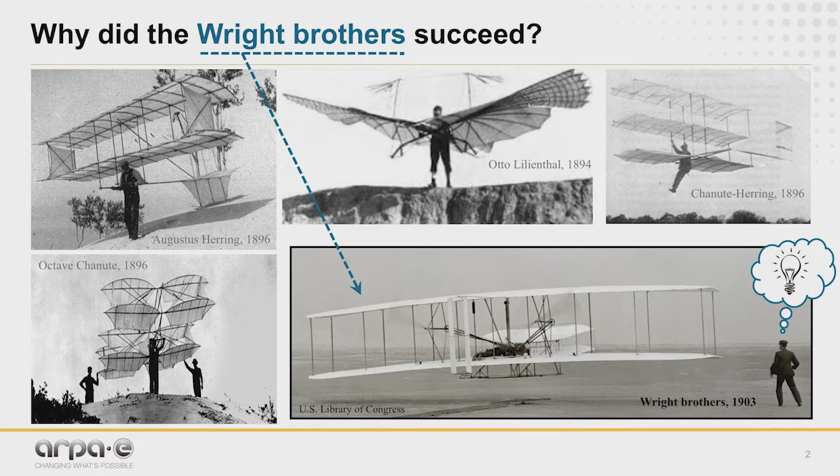You can be thinking that maybe it's because of the very interesting and advanced airfoils that they put together, or maybe because of the experiments in the wind tunnels. I would like you to see an answer in the area of control. In my opinion, it's because they used control concepts in the design of the system.

The plane of the Wright brothers had very small wings at the front. Because of this, we actually change the relative position of the lift and the weight, and the plane itself tends to overturn and quickly go upside down. They did this because they realized they needed a plane that was very fast, reacting to wind disturbances in order to be able to fly.

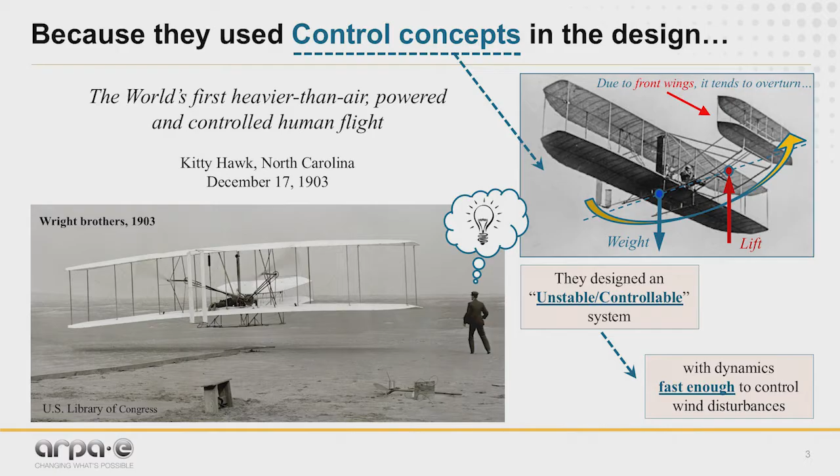This is actually a control concept that they found, and the plane is actually unstable. So they also put a control system to stabilize the plane. Control was in the very beginning of the thinking of the system, and by putting these small wings they were able to be fast enough to reject the disturbances.

Another very interesting example, now in energy, is the very first wind turbine for electrical generation. That was actually in Cleveland, Ohio, in 1887. The engineer who put this together was Charles Brush, one of the pioneers of the electrical field. One of the things he did was also to incorporate these control ideas.

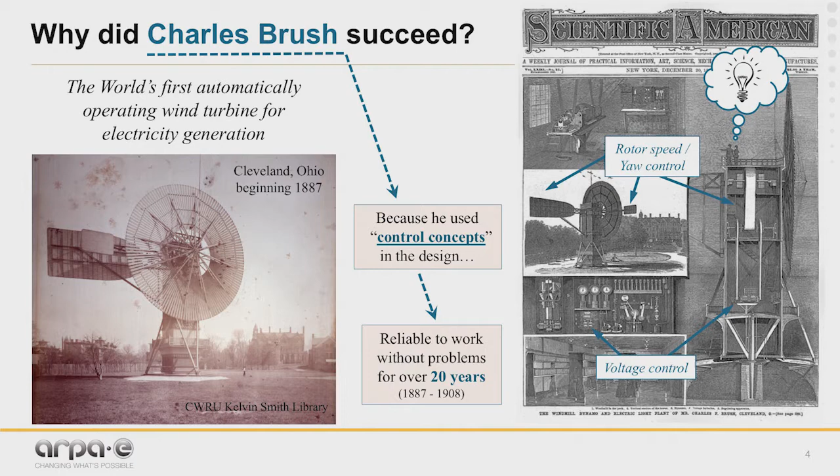It was actually a huge system, more than 17 meters diameter, 144 blades, but one of the keys was the incorporation of a rotor control with a yaw control system, and that allowed the system to work without any problem for over 20 years. So again, control at the very beginning of the design of the process.

However, we are not in the same situation today. Many of our universities, and the way we study engineering today, is very specialized, because technical systems are more and more difficult, so we have to specialize, but now we have a narrower picture.

So it's more difficult to work as these pioneers, like the Wright brothers or Charles Brush, did in the past. As a consequence, we have a sequential way of working generally in companies: when we have a problem, first of all we design—let's say if it's a wind turbine—the aerodynamics, the mechanical structure.

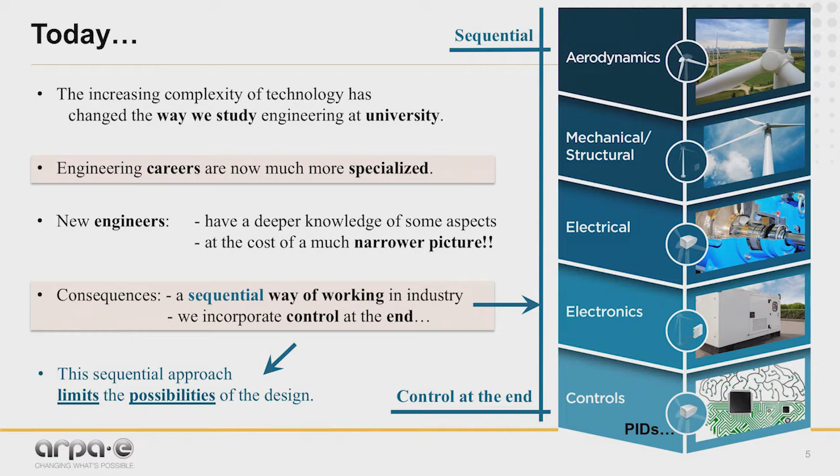Then the electrical problem, the electronics. And at the very end of the picture, we ask the control engineers to develop the control solution, the control algorithms to control the system automatically, maybe with PIDs or things like that. This way of thinking, this way of working, is actually limiting the possibilities to have an optimal design at the end.

So my idea for this fast pitch today is just one thing: to go back to this multidisciplinary, concurrent engineering way of thinking, putting control concepts from the very beginning of the design of the system.

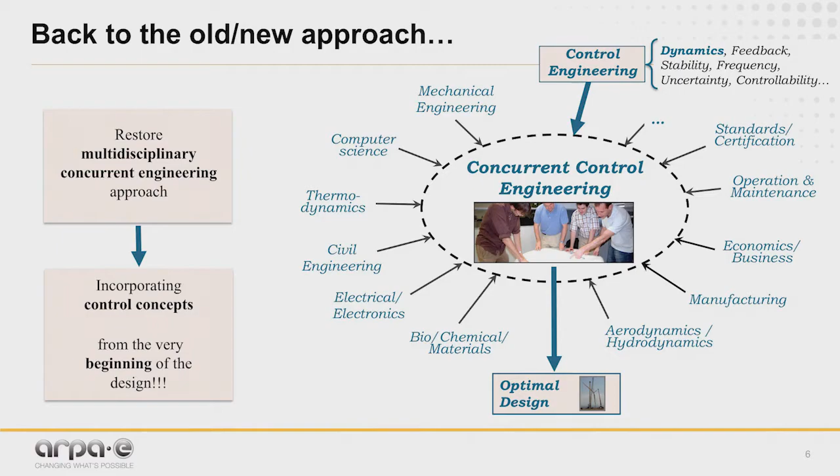So we have to have all the engineering departments working together: the mechanical engineers, the electrical engineers, the aerodynamics engineers, thermodynamics, whatever we have, with the control engineers as well, with the economics, with the operation and maintenance, with the regulations, with the standards, with the certification, everything in the same table, working together, and actually incorporating control engineering concepts—things like dynamics, feedback, stability—the things that the Wright brothers put into the picture to be successful. In this way, we will be able to reach optimal designs in many areas.

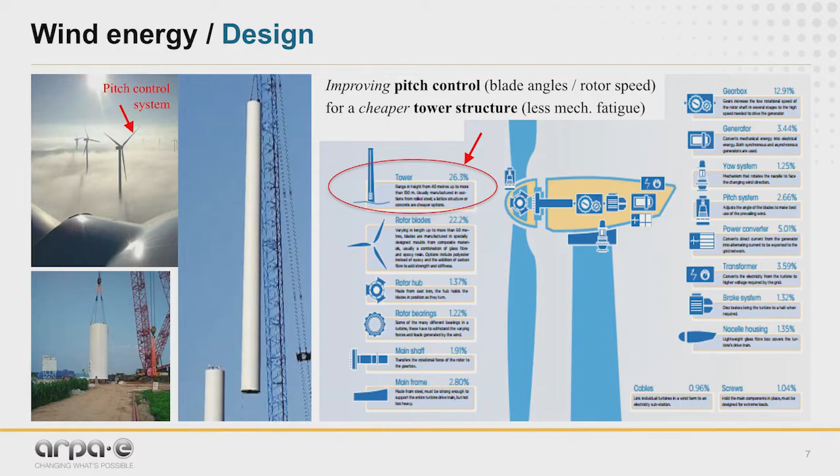A couple of examples, actually personal ones I was involved in the past, quickly. One is about wind energy. I remember a project at the end of the 90s where I was involved in a multi-megawatt wind turbine design. By designing a better pitch control system that moves the blades to control the rotor speed, we actually reduced a lot of the mechanical fatigue of the tower, and we were able to have a much cheaper tower—about 30% cheaper than the competitor building a machine of the same size at the same time. So this is control at the very beginning, helping us have a much better design at the end.

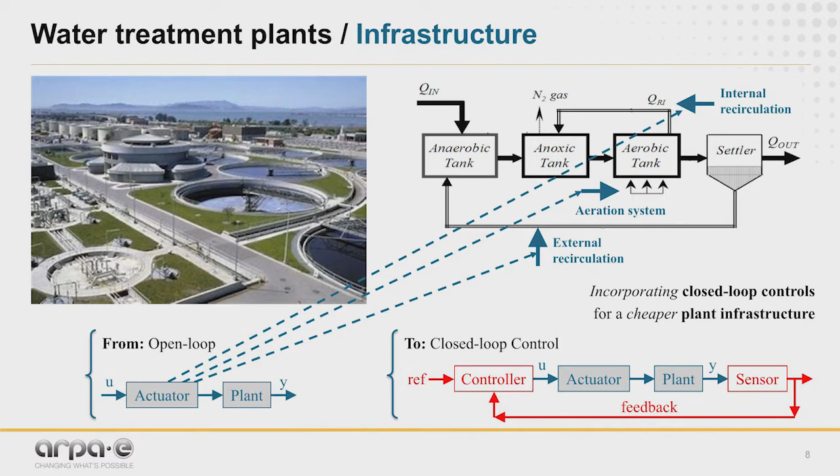Another project I was involved in, same period, was about a water treatment plant for a big city. Usually water treatment plants have actuators—like this one you see in the picture, for nitrates and ammonia removal. So you have about 3 actuators working continuously with the same set point, typically depending on the temperature—3 or 4 different set points over the year. You also have internal recirculation, external recirculation, and other things like that. If we incorporate sensors, feedback, and control, we will be able not only to improve the performance but also to reduce the cost of the installation and infrastructure, and this is a very big thing.

With all these ideas, I would like to propose a potential new ARPA-E program around these fundamental concepts of concurrent control engineering. This program—and I'd really like your feedback on this—would bring together many different communities: mechanical engineers, electrical engineers, bioengineers, chemical engineers, all kinds of engineers, control engineers, economics, etc. We need this new philosophy to design systems. We probably need some mathematical formulation of how to incorporate dynamics, feedback, and control into the picture. We need special sensors or new actuators, distributed sensors, optimization algorithms, taking into account things like artificial intelligence or machine learning, all ending up in a computer program to do the optimization.

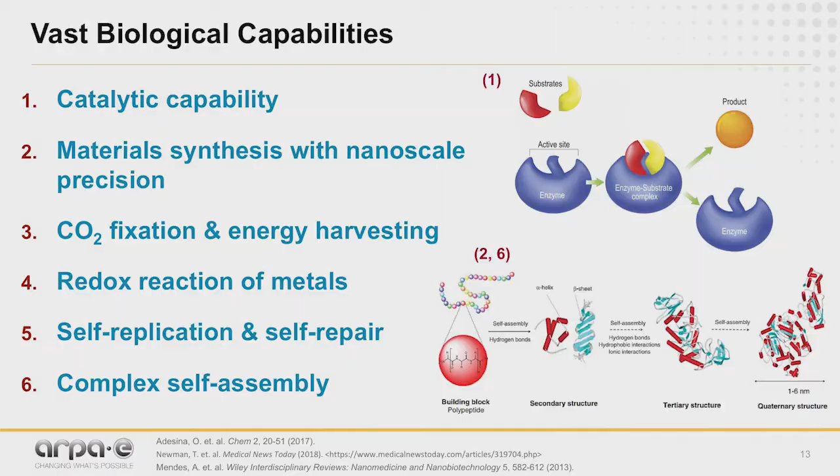So we can imagine that if we can harness all these vast biological capabilities of microbes, we can start developing technologies that could be potentially unparalleled, not only in their low cost, but also their deployability. We're also luckily living in an era where researchers have figured out ways to engineer microbes specifically to produce unique types of products and materials.

One way we can envision doing this is by very precisely designing what genes we want our microbes to express. We can then synthetically build this DNA, insert it into a host cell, allow the cell to replicate, and in the process produce the various materials and products that we desire.

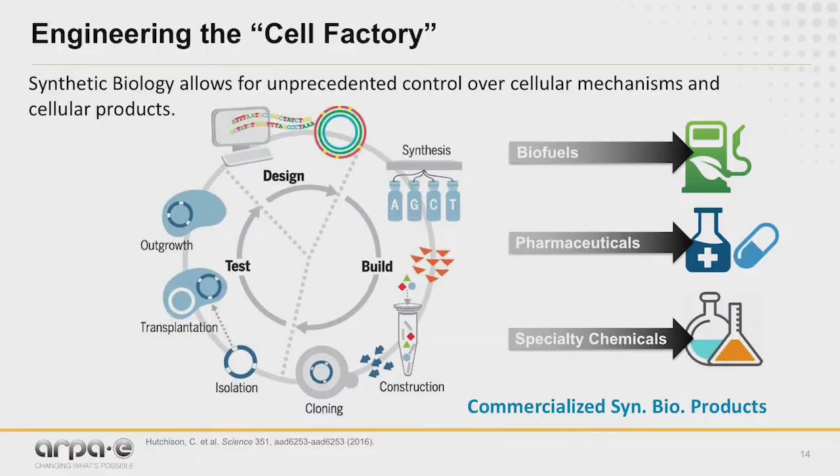In fact, synthetic biology has matured to such a point that we're already seeing commercial efforts in areas like algae-based biofuels, pharmaceuticals, and even specialty chemicals. But with such a rich technology to work with, I want to ask: what more can we do with synthetic biology? Specifically, can it help us generate materials, structures, and processes that were previously thought to be impractical or maybe even impossible using biology?

One area I want to think about is electronic waste. In 2016, the US alone produced about 6.3 million metric tons of electronic waste. And globally, about 80% of this electronic waste gets either landfilled or incinerated.

Without even considering the energy input necessary to build these electronics, just purely focusing on the material side of things, recovering the metal from 100,000 phones, which is really not that much, will yield about 5 pounds of gold, 2,000 pounds of copper, and 55 pounds of silver. Right now, all of these useful materials are simply either sitting in a landfill or being systematically destroyed.

Knowing that certain microbes can actually participate in the redox reaction of metals, I want to pose the question: can synthetic biology make recycling of electronic waste practical?

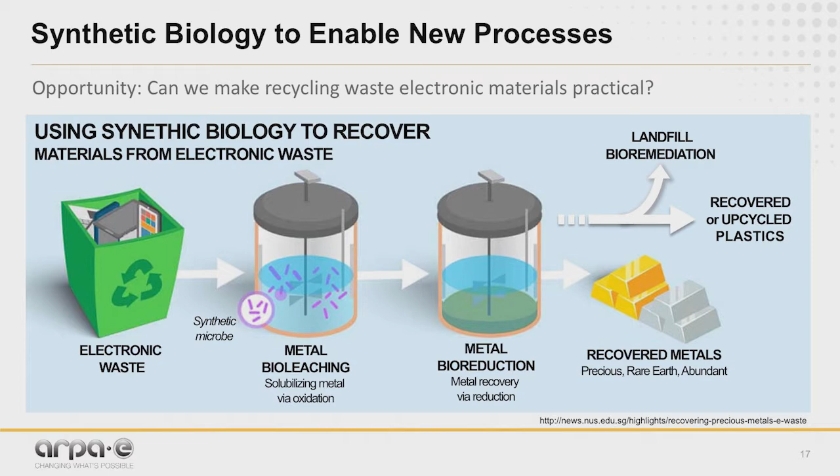Instead of incinerating or landfilling these electronic materials, what about designing or synthesizing microbes that can act in a bio-leaching capacity, and can bio-reduce metals across the entire spectrum, from precious and rare earth to even abundant metals? What about also engineering microbes to potentially recover plastics or aid in landfill remediation?

So in some sense, this scheme gives us an idea of how we can use synthetic biology to tear electronics down. But what about also using synthetic biology to build electronics back up? Can we exploit additional biological facets like nanoscale manufacturing precision and self-assembly to create complex molecules and nanostructures that might otherwise be too cost prohibitive to make synthetically, and that could be made outside the confines of an energy-intensive clean room facility?

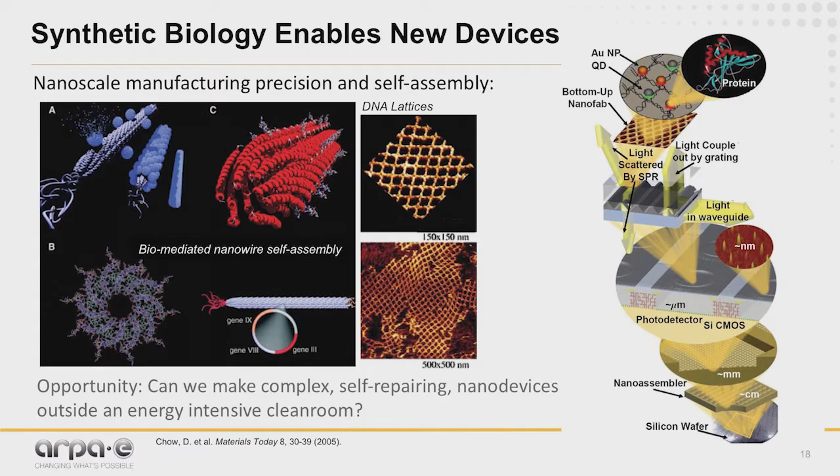But what about also using synthetic biology to make more macro-scale materials? Recently, synthetic biology has allowed us to engineer microbes that can secrete very specialized extracellular materials, essentially creating highly functionalized biofilms. Can we very specifically tailor the type of biofilms we create to generate membranes and films that possess a gamut of properties, including programmable adhesion, maybe even electronic and optical properties?

And what about programmable material properties? If we're able to do this, is this perhaps a pathway that can allow us to make ultra-cheap, high-performance, tailored membranes?

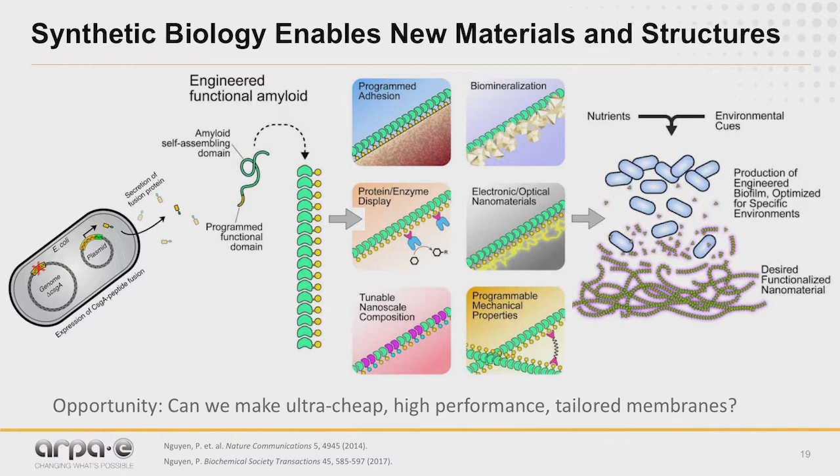If this is perhaps a pathway to do that, that could have huge implications in the area of industrial separations. So currently, separation processes account for about 16% of the total US energy consumption, and about half of separation processes currently rely on distillation.

If we were able to replace about 90% of distillation with membrane-based separation, this would allow for about 7 quads of energy to be saved annually. This is a huge amount of energy.

But currently, there are several barriers to the adoption of membrane-based technologies. Namely, many current state-of-the-art membranes are incredibly expensive. A lot of them can't tolerate harsh conditions like high temperatures, pressures, and extreme pH. Furthermore, most of them are susceptible to fouling.

But interestingly, microbes have been generating biofilms for generations that can survive in the harshest of terrestrial environments. They can survive high temperatures, high pressures, high salinity, even extremely acidic and basic conditions. So I want to posit the question, is maybe one future direction for industrial separations going to be due to synthetic biology? Can we possibly use biofilms for these purposes?

So ultimately, I want to ask, what breakthroughs need to happen in order for synthetic biology to really revolutionize our energy landscape? And I want to pose this question to you. What innovations are necessary for synthetic biology to produce materials, structures, and processes that, first off, can behave with superior performance relative to their non-biological counterparts?

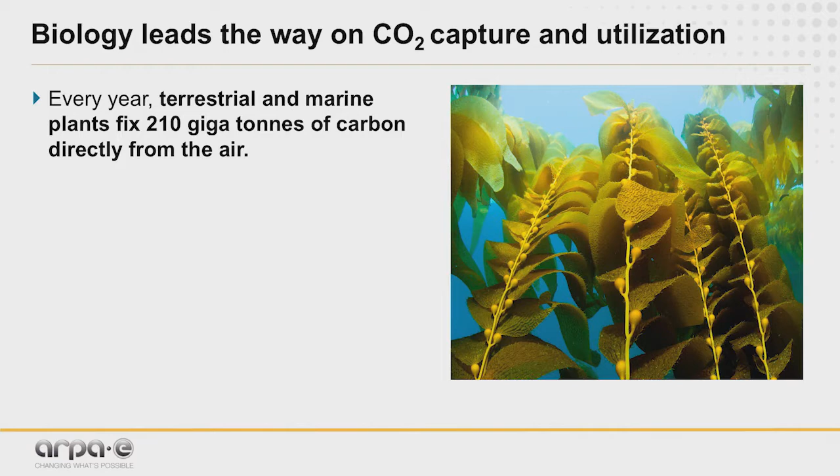And to start with, I really want to remind everybody that biology already leads really with regard to CO2 capture and utilization. Every year, plants, terrestrial and marine together, fix 210 gigatons of carbon directly from the air. And we actually, for fossil release, it's about 10 gigatons of carbon a year.

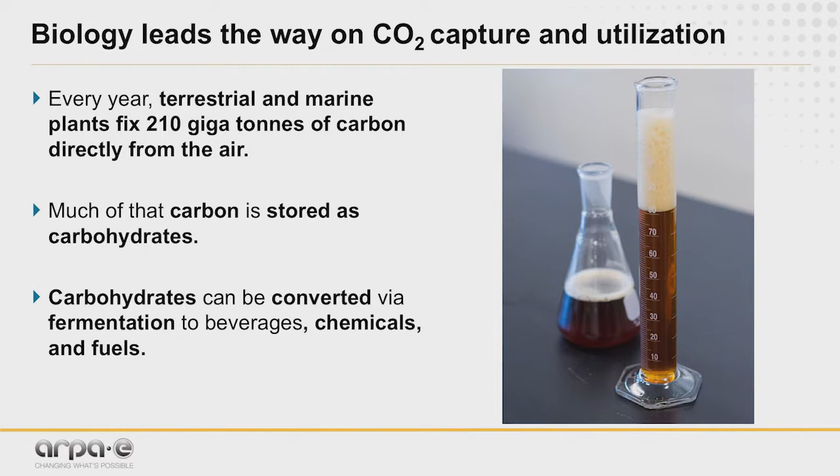So there's really big carbon flows, and a lot of this carbon is actually captured and stored in various forms of carbohydrates, be it wood, grains, starch. And these carbohydrates, we have actually learned over the millennia by now to convert with usually fermentation processes into beverages, chemicals, and fuels.

And so, as I said, this is something that we have done quite a bit, and really in the last 40 years, particularly with molecular biology, we have been increasing our abilities and our flexibility. And then synthetic biology, with building new pathways from the bottom up, is starting to give us access to an incredible portfolio of products that we can make for chemicals and fuels in particular. So this is really something that is taking off tremendously.

And not only do we enhance the diversity of products that we can make, but we can also make them better, more efficiently, and in part we really organize these oftentimes simpler cells by putting in compartments, putting enzymes together on scaffolds. So we end up actually with wonderful biocatalysts.

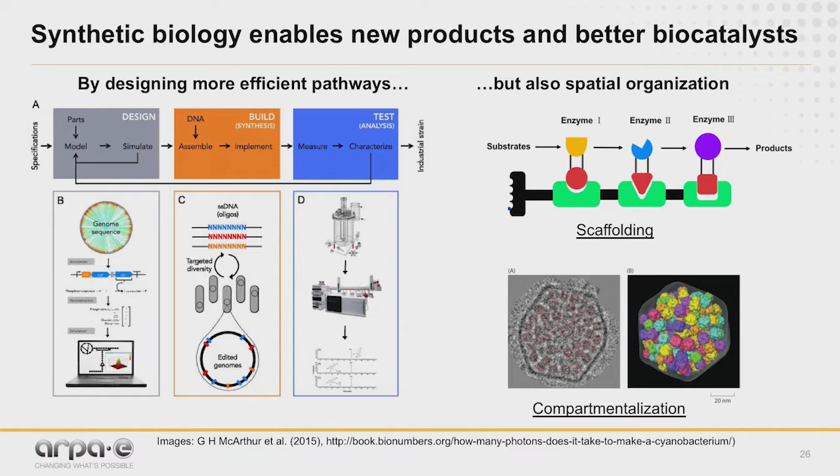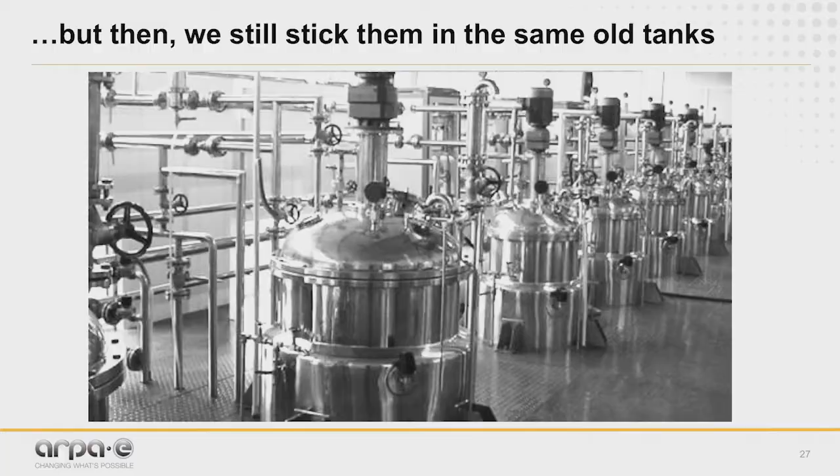And what do we do then? We stick them in the same old tanks. So it turns out they're not all that old, so we've gotten a little shinier over the years. But principally, we are still not quite measuring up to the potential of the engineering capabilities for the organism.

We still basically take fermenters, bioreactors. They are meant to keep them happy. So usually microorganisms need a steady food supply, constant temperatures. They like a constant pH. You see a lot of these parameters follow the optimum curves, and you try to keep it in that range.

And so we have developed pretty sophisticated fermenters, actually, where we can have a sensor that tells us what is the pH, what is the temperature.

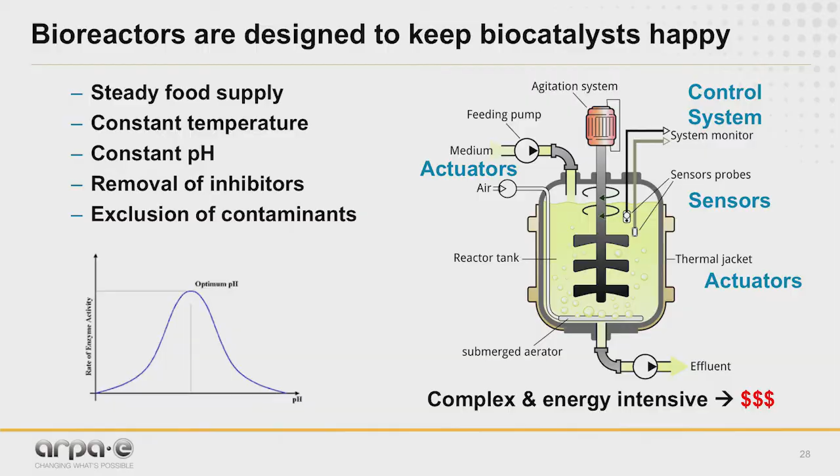Are we running out of oxygen, for example, and then we can start pumping things in. But typically we have to mix it with a lot of power. It's usually quite a complex system, and it's really driving up the cost of the operation, particularly when we scale, because then mixing times become very long, and we don't get the maximum potential out of it. Most importantly, we're really not taking full advantage of the microorganisms.

So what that leads us to is, is there a different way we can think about bioprocesses? Can we make them cheaper, more robust, and particularly scalable?

And so I want to challenge you with an image. This is actually a fermenter. It's a reactor. It's a silage pile. This is probably one of the most simple fermenters you can imagine. And it's big—if you see the lower right corner, that's a little tractor, so it's actually a full-size tractor. It's really, really big, but it also has some challenges.

You can't really mix that thing very much, other than with a shovel, and that takes a long time. Maybe you can take the tractor, but that's still not really effective. So you have to start thinking about how do I control that, but also how can I maybe adapt my microorganisms to live and respond to that.

At that point, I really enjoyed conversations with Mario about when he came to the agency, he brought this concept of concurrent control engineering. When I learned about that, I felt it was a really interesting opportunity to integrate these things—looking at that as a central paradigm that allows us to look simultaneously at the engineering of the biocatalyst as well as the reactor design, and really see how we can do this together and come up with novel solutions that take full advantage of the organisms, but also give new room to the reactor engineering that hopefully is driving down cost and driving up performance.

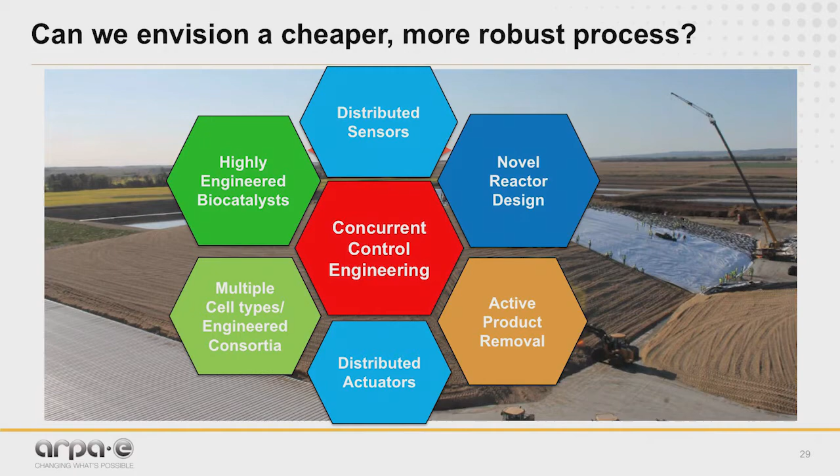Another part, pushing it even one level further, is that we're looking not only at one individual cell type working throughout the reactor, but if we have heterogeneities in our systems, we might want to respond to that with heterogeneities in the populations of cells we're using. So there might be differentiation, or we might use consortia working together on different parts. These are just ideas of where this could go.

The fundamental question is really, what are your ideas and how can you reimagine bioprocessing? I think this is a conversation we would like to start. We believe there are tremendous opportunities, but we are also really looking for your input, for communication with you.

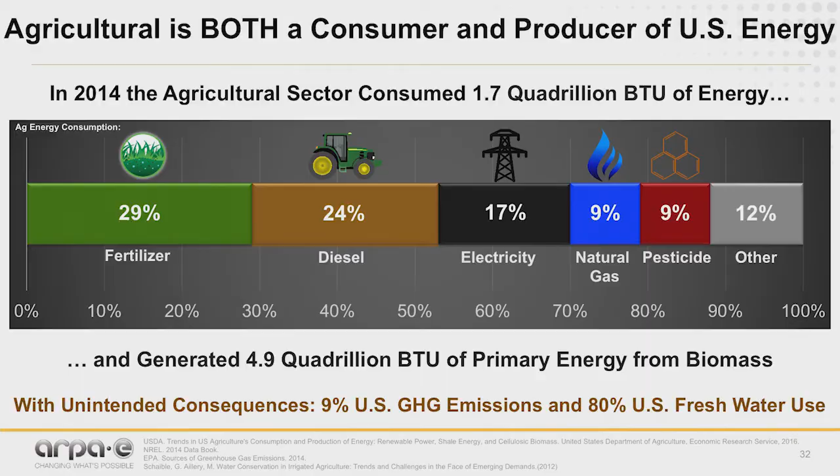So as we think about baseball and agriculture, what do they have in common? Well, first, both actually exploit the expertise of a general manager who is on the field, basically making management decisions and guiding that team to success or victory.

The other thing they have in common: in the springtime, everyone is a series contender. When you start your season, you believe your team's going all the way. They also have in common that every field they play on is a different environment with different challenges, and it's routinely heard by baseball fans and farmers alike, when the season ends and they were a little disappointed, the statement: 'Wait until next year.'

Well, with agriculture and the planetary challenges, next year is becoming more critical for us. Branch Rickey once said that baseball is a game of inches. Well, it's now a game of nanometers and milliseconds. And having tools such as sabermetrics enabled baseball to actually go digital.

As we think about the convergence of technologies in the 21st century, data analytics actually provides us with massive opportunities in this space as we think about bioenergy production and agriculture in general.

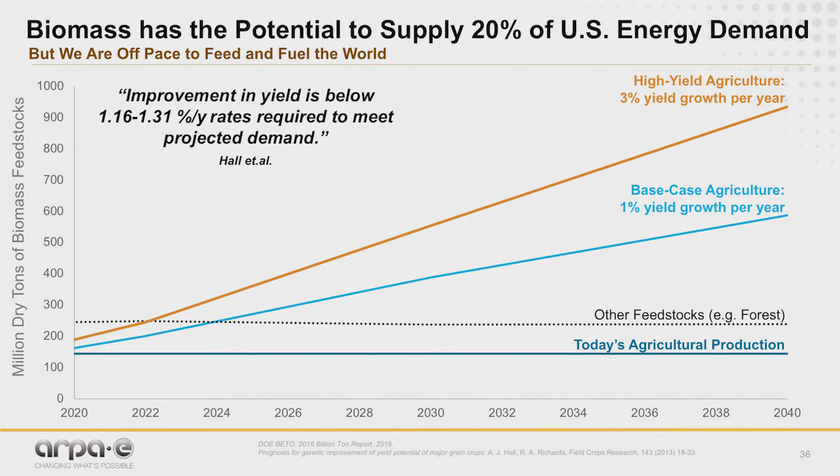But we have to increase our yield gain. We actually have to achieve the same yield gains that we realized during the Green Revolution, and they are clearly within our grasp. The good news is that opening day, the day we actually plant our crop, is the time when we have our greatest genetic potential. That's 100% genetic opportunity.

But every day after, nature takes a bite out of the yield. And if we use the very best management practices, we're able to achieve approximately 40% of the genetic potential. So we basically give away 60% of the yield just due to our inability to manage the environment to its optimum.

And if you look at the national average, the opportunity is actually even better, in the sense that producers are at 20% of the genetic potential. They achieve about half of what the best management practice is because they're not optimizing the decisions. So if you look at agriculture, it is a game of inches. Thousands of decisions are being made on the field every day in a sub-optimal way, and those decisions add up to the 60% yield losses that we observe year over year.

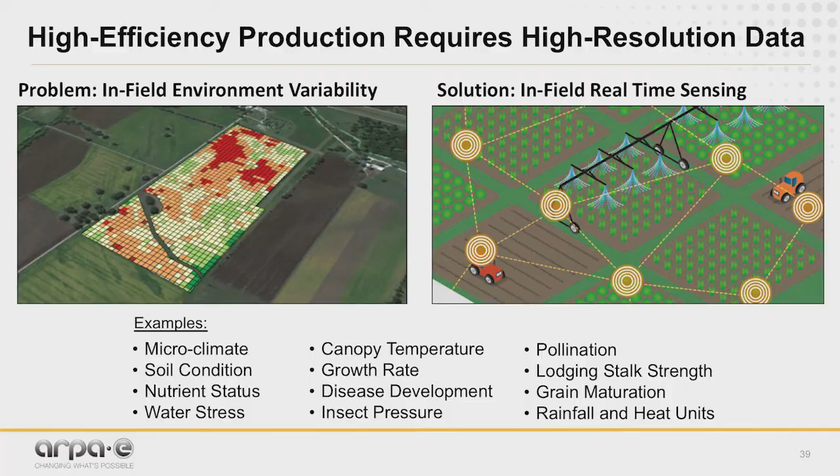So what we're pursuing is actually a program that, on a scalable way, is looking at developing high-efficiency production systems that harness data sets that we can collect in the field. The primary problem we're trying to fix is that every field is different, every game is different. And in that field, we're trying to manage microclimates, soil, pests, water, all these variables in a very complex way. We now have tools that allow us to start collecting those particular data sets, and we have new ones coming along.

We believe that distributed intelligence is a key attribute for our being able to realize these genetic gains, but distributed intelligence with a difference. This isn't the IoT that we are currently familiar with. We're talking about delivering distributed intelligence to western Nebraska, where it's a long way to run an extension cord all the way out there to the field.

So we have to have systems that are able to deliver power in a very affordable, accurate way. We're looking for new sensor modalities. We're looking for data analytics that actually provide real-time knowledge. Data for data's sake means nothing. We actually have to create tools that create things that are operable in the field.

We're really enthusiastic about a lot of cutting-edge frontier platforms that are coming together in sensor, power, analytics, and communication capabilities. Lab on a chip, where we're able to measure a plant's metabolic health on a real-time basis. Using plants as electron harvesters themselves. Computers the size of grains of sand.

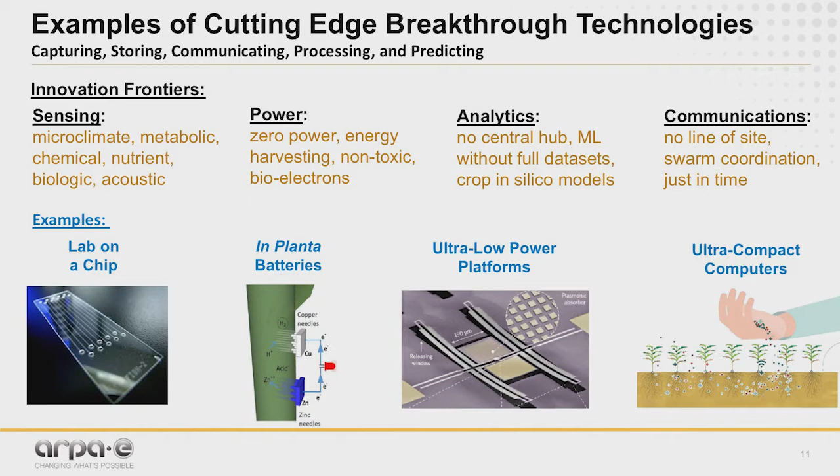At the end of the day, we have to harness all of these tools so that we're making the right decision at the right time, every time. Failure is not an option. Integrating all these systems and inventing novel innovations along the way, that's ARPA-E hard. We're asking for you here today and your networks to help us think through what a program like this in this particular space would feel like.

What I want to leave you with is one final quote from Michael Lewis. One absolutely cannot tell by watching a batter the difference between a great 300 hitter and an average 275 hitter, because that difference is only one hit every two weeks. We fundamentally believe by digitizing ag in this particular space, we can transform our ability to create a no-compromise bioenergy solution. Thank you.

Hi, I'm Joseph King, and I'm going to talk about something that's so fundamental that we all take it for granted. I'm going to talk about cement, concrete, and the infrastructure.

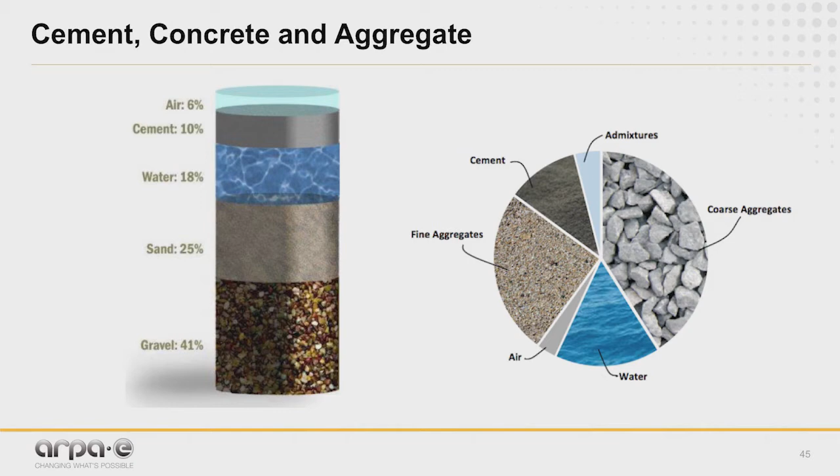Now, my engineering friends have been pushing me for years to get into something big, something in the material space. And since I look at engineers as kind of the oxen that pull society ever forward, I take their comments to heart. That's why I picked cement. It's not big, it's bigger than big. The largest produced material on the planet, and second only to water in terms of consumption.

So, quick review. You take limestone, mix it with a little gypsum, pyrolyze it, you get cement. Take cement, mix it with water and aggregate, you get concrete. Take concrete, and that is the vast bulk of the material used in our infrastructure.

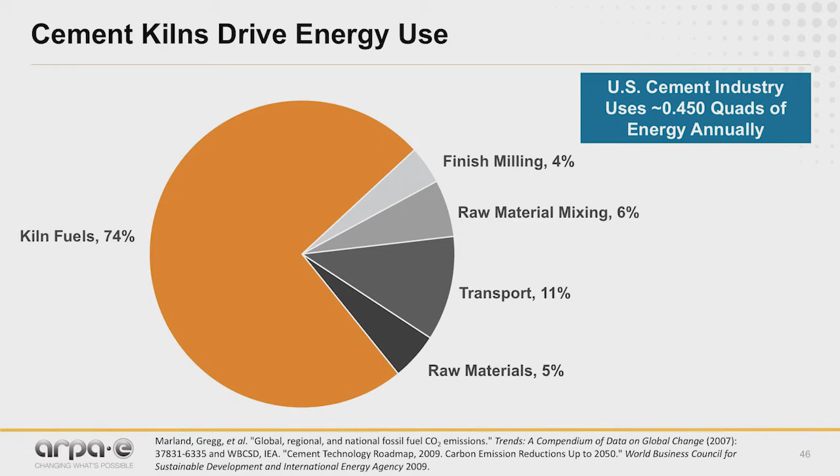Now, when people look at cements and concretes and try to improve its energy profile and greenhouse gas production, they usually look first at the kiln. Why? Because that's where the energy is imparted and 90% of the greenhouse gases come from. But modern kilns are extremely good at what they do and highly efficient.

So a lot of people then move further upstream, doing everything on the front end, and that is coming out with materials that, although incredibly clever and good at what they do, are what I refer to as an awful lot of sizzle for very little steak. What I mean by that is there's a volume issue. So much cement is produced annually that for them to ever grow their businesses large enough to make even a marginal impact is almost impossible. It'll take decades upon decades.

Well, I'm going to look at the back end, post-production, but change it up a little bit too. And that is, if you can increase the durability of the cements and concretes by a factor of 2 or 3, you de facto diminish the embodied energy over time for that structure.

So it's a different way of looking at reducing embodied energy and greenhouse gas production by improving the durability of your materials. Now you might say, well, why are you looking at infrastructure? Well, first off, it's the biggest use of cement and concrete in North America, actually the world.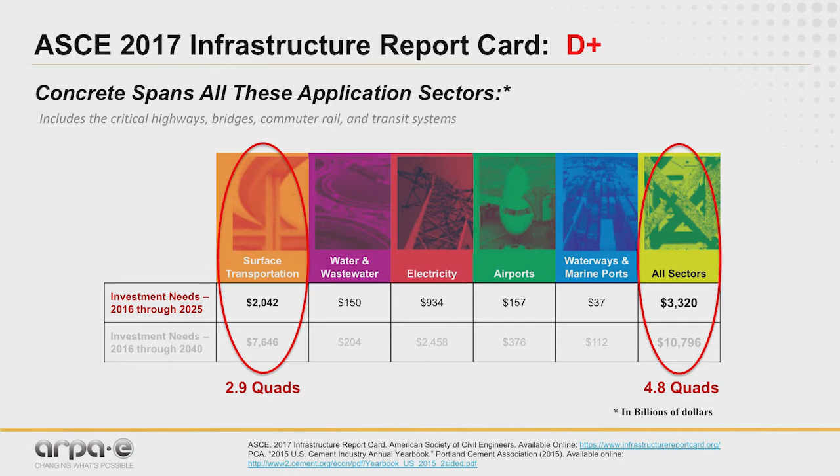So, you might say, okay, Joe, nice history lesson, but what are we like today? Well, we're not doing so well. This is our report card from the American Society of Civil Engineers. And it's going to cost us a fortune, plus an amazing amount of energy over the next 5 to 7 years, just to continue our current Band-Aids and tourniquets approach to managing our infrastructure. So you might say, well, Joe, is there a solution to this? Absolutely.

Imagine the Capitol building. It took its current form in the mid-19th century when Thomas Walter, the fourth architect of the Capitol, expanded it out to allow for all the new states joining the Union, more than doubling its size. And then he capped it with this dome that is built in what is known as the wedding cake style. This dome is almost 9 million pounds of cast iron.

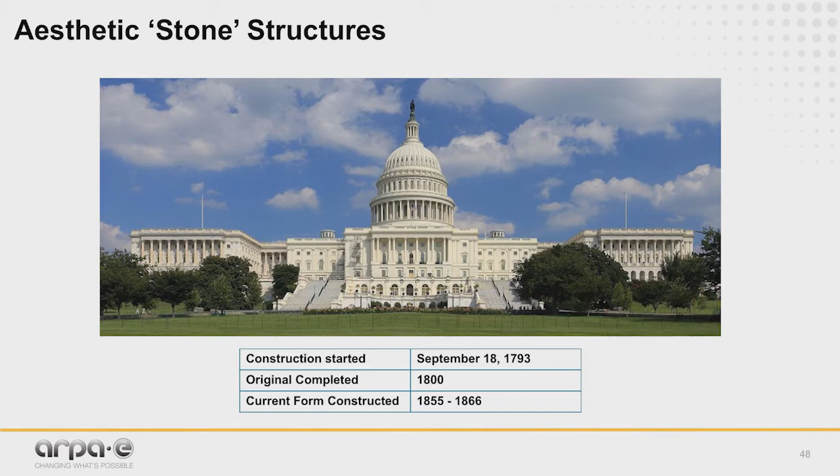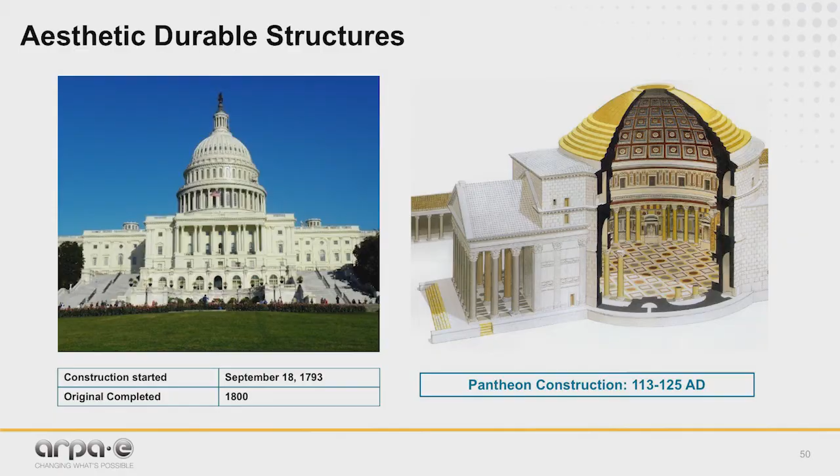Some of you may know this building, the Pantheon in Rome. It's 2,000 years old. It too has a dome. However, its dome is 100% unreinforced concrete, and in fact, this dome is 50% larger than the Capitol's dome. You might say, that's interesting. Well, no modern engineer using contemporary materials would dare to build this structure this way today, which is why even 2,000 years later, it's still the largest unreinforced concrete dome on the planet.

In fact, this building is so pristine, it's been in active use for the last 2,000 years. This other building, no one's really sure how often it's actively used. Now, you might say, what's the difference?

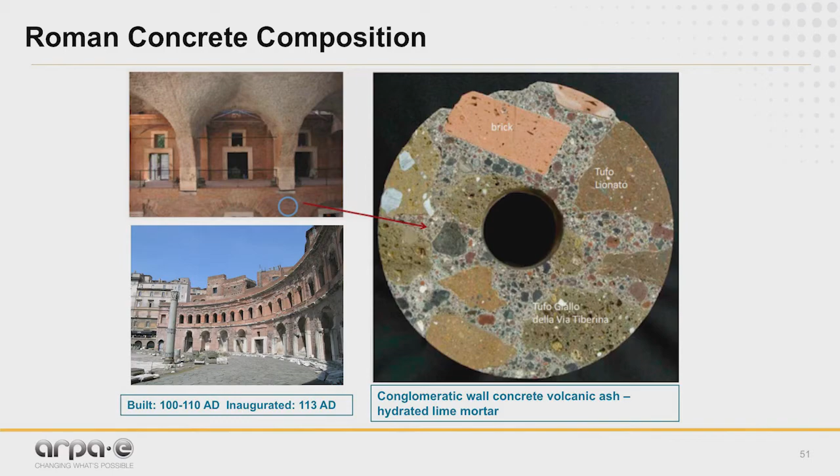This is the Great Hall of the Markets of Trajan, actually built before the Pantheon, but out of the same materials, probably the same union workforce. And what you see when you look at it is it's kind of a dog's dinner of stuff all mushed together. But using modern analytic and spectroscopic techniques, what you see when you look at it is also kind of a dog's dinner of stuff mushed together.

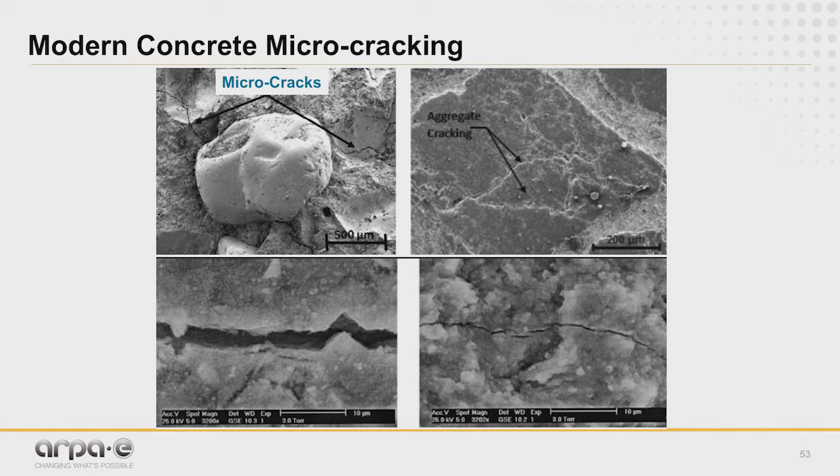But to a trained spectroscopist, mineralogist, or material scientist, what you notice immediately is there is no microcracking. And in fact, you see a lot of structures and elements in there that are unique and not common to any contemporary cements and concretes. Microcracking happens almost immediately in modern cements and concretes, and it is a prelude to the ultimate demise of those structures years to decades later.

So, what can we do? First is, can we replicate some of those structures and minerals that we saw in the Roman concretes and improve the overall performance of our materials?

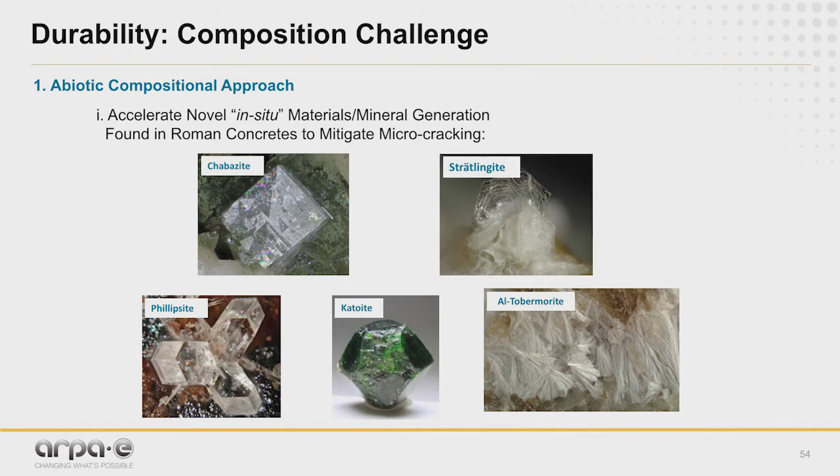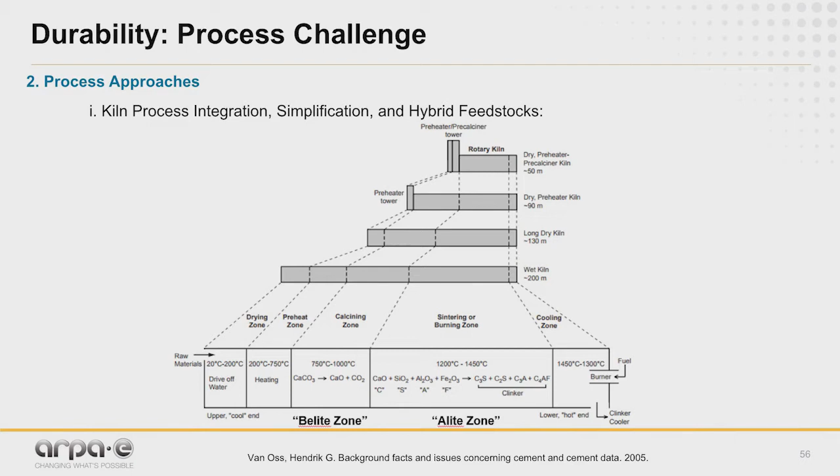Reactors are very well understood. The bottom row is basically the chemistry that's taking place, and there's an evolution of the reactors all the way to modern-day rotary kilns. These kilns are very efficient and very well integrated in terms of energy use, but I'm open to any suggestions on how to improve them further.

If we change some of the composition up front, maybe we can do something at the kiln level too. And third, is there a biogenic pathway for what is going on?

Biologists and geologists have noted on certain volcanic islands in the North Atlantic that in areas of high microbiological activity, not merely the calcite and calcium carbonate materials produced by some of those things being studied right now, but rather a lot of those same minerals that the Romans observed in their cements are there as well. So the question is, can we get our little buddies to get their flagella together and play on the big kids' team for once?

The goal is clear: can we increase the durability of the cements and do it in a way where we can leverage existing infrastructure to produce a higher performance material at lower cost?

The social benefits as a result would be manifold, in terms of a more efficient infrastructure leading to a more efficient economy, higher productivity, and a lower frustration level all around.

And if we can manage to do all that, then maybe, just maybe, our ultimate personal desire can be met. And that is, we might be able to stop saying those bad words and make our mamas proud again. Thank you.